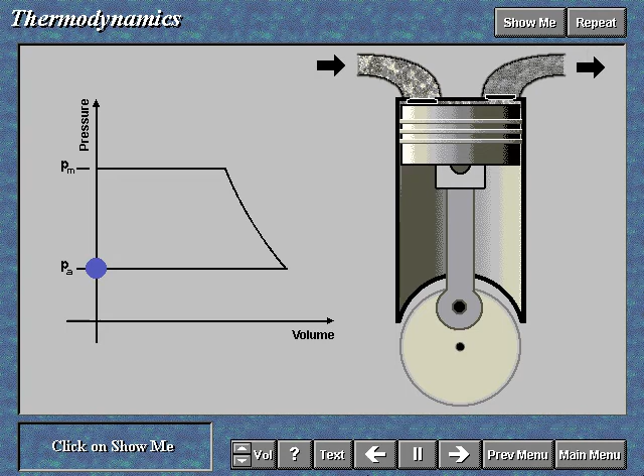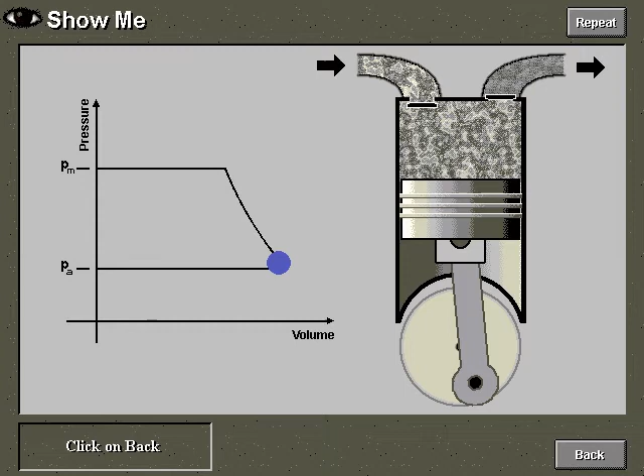The work expended in compression is transformed into heat. It is possible to remove only a small portion of this heat, and as a result, the temperature of the gas rises during compression.

This increase in temperature causes various parts of the cylinder to heat up to an average value that lies between the temperatures at the beginning and end of compression.

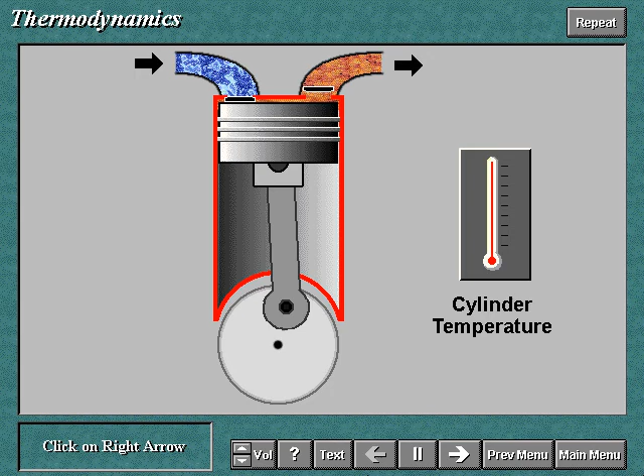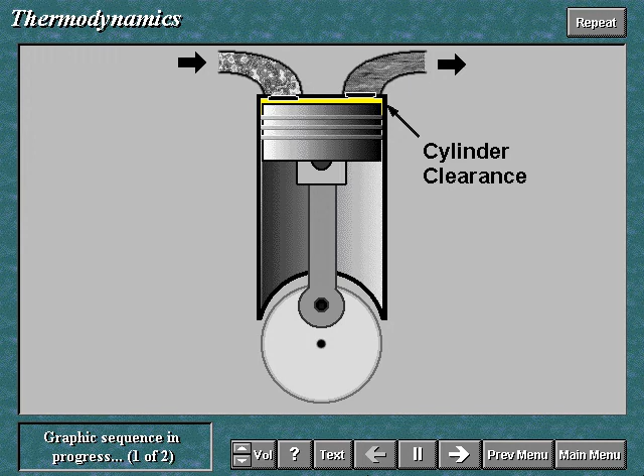In each cycle, there is an area of the cylinder that is not swept by the piston. A volume of gas remains in this area at the end of each compression stroke. This volume is called the cylinder clearance.

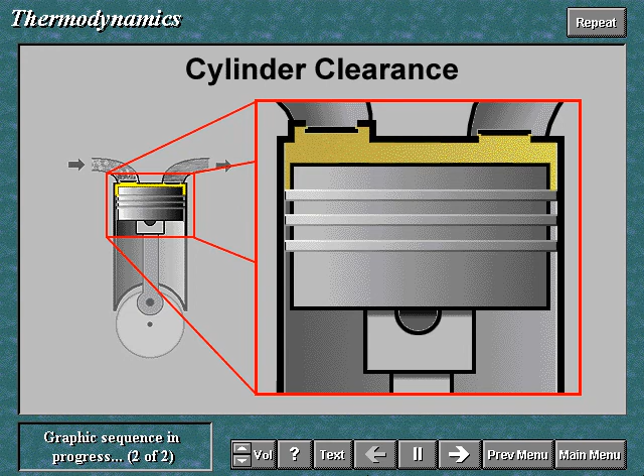The cylinder clearance consists of the volume between the cylinder head and the piston at the end of the stroke, the volume between the cylinder walls and the valves, and the volume due to the difference between the diameter of the piston and the diameter of the cylinder.

Due to cylinder clearance, a certain amount of gas remains trapped within the cylinder at the end of the compression stroke. This gas is under discharge pressure and temperature.

The subsequent suction phase can only begin when this remaining gas has re-expanded to pressure P sub A. The suction valve will not open until this pressure is reached. This causes a reduction in inlet volume.

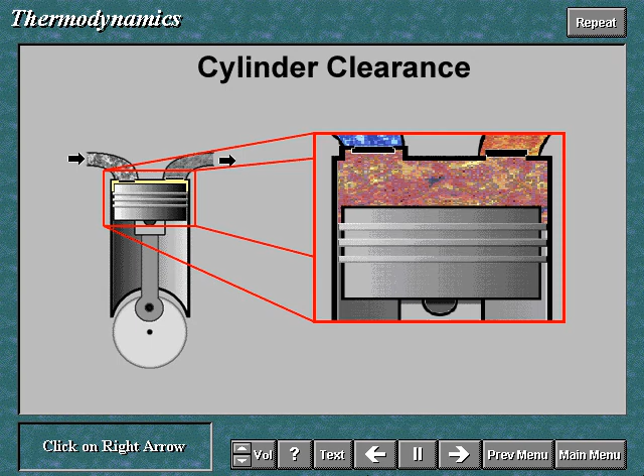Compression occurs only in the forward stroke.

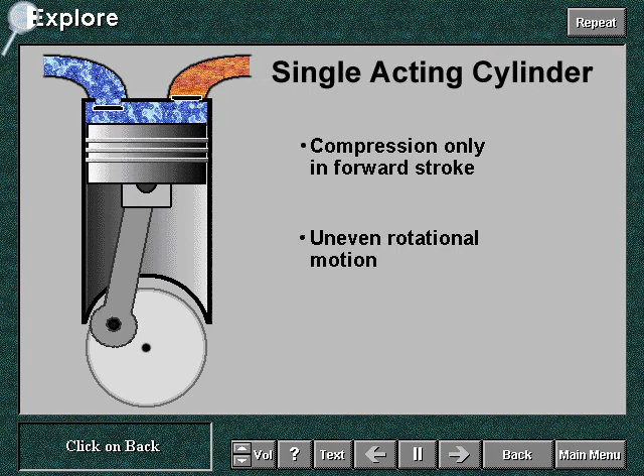Subdividing the compression work between the two strokes of the crank revolution results in more regular rotational motion for double-acting cylinders.

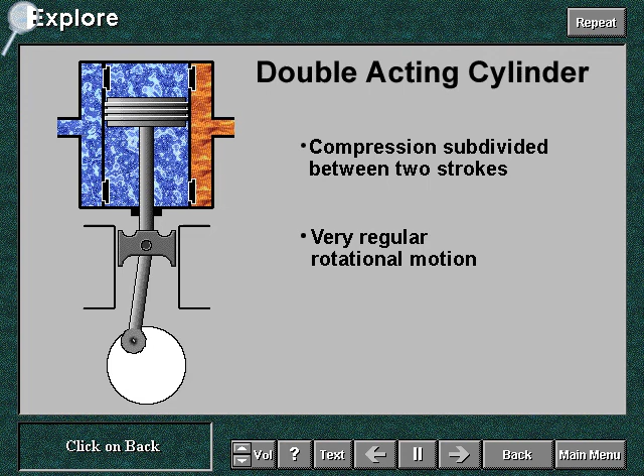In main and big end bearings, the pin always makes a complete revolution. This allows hydrodynamic lift to take place.

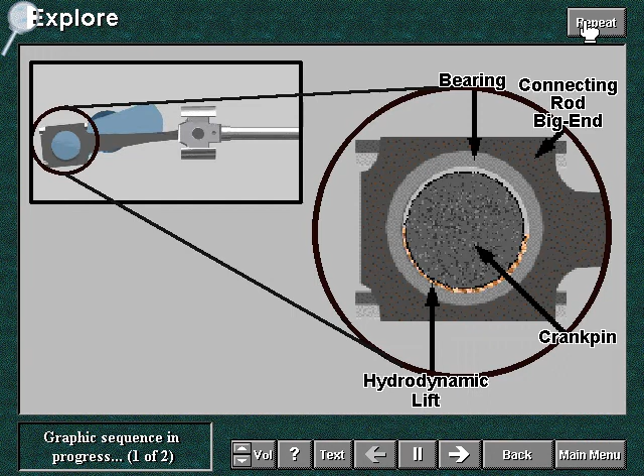In small end bearings, however, the crosshead pin only makes oscillations. The lack of complete rotation makes the conditions less favorable for hydrodynamic lift.

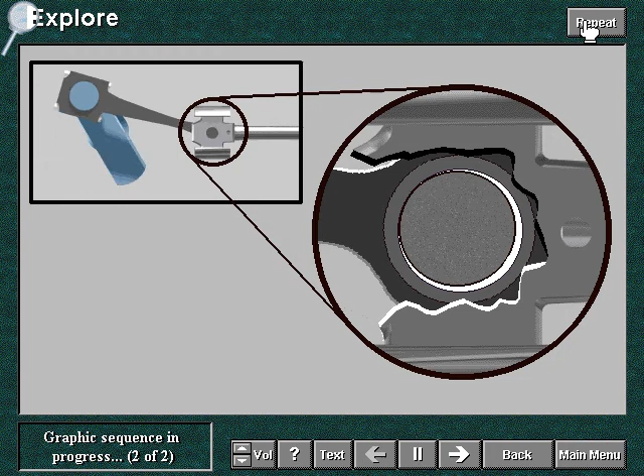All valves used on reciprocating compressors are made up of 4 basic elements: the valve seat, valve plate, springs, and valve stop. The valve seat is the circular component through which the flow ports are opened.

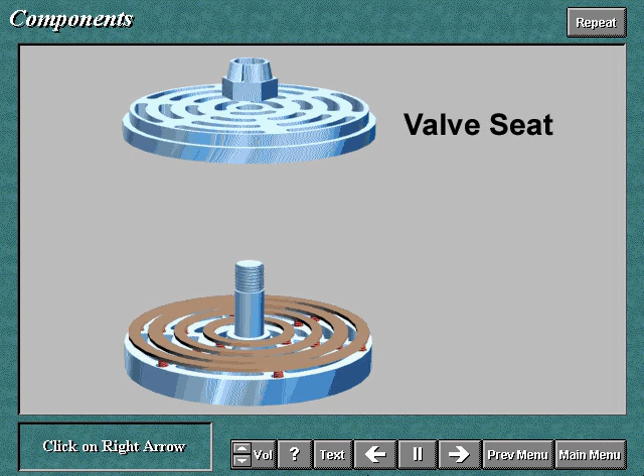It is sealed by the valve shutter. The seat and valve shutter together mechanically support the pressure differential. The seats are mounted in housings arranged along the body of the cylinder.

The valve shutter is the component that alternately opens and shuts the flow ports. The springs are the components that return the valve shutter onto the seat when the flow of gas has stopped.

The valve stop or guard is the part against which the valve shutter stops. It determines the degree of lift that the shutter may have.

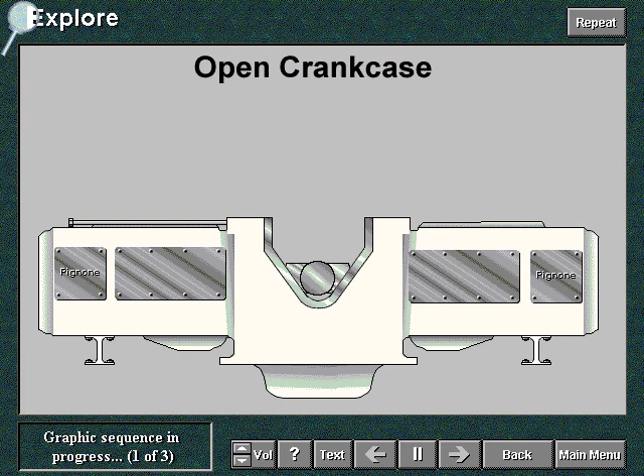An open structure is used on large frames. The crankcase is U-shaped and allows for the crankshaft to be removed vertically. You can see that the pull of the cylinders tends to open the U-shaped crankcase.

To protect from this force, bars must be used to brace the upper part of the crankcase. These bars are called crosspieces.

The valve rings are kept lifted by the drag force due to the gas flow. They remain lifted while this force is stronger than the opposing force of the springs. The valve, however, must close just at the end of the stroke, whether it is a suction or discharge valve.

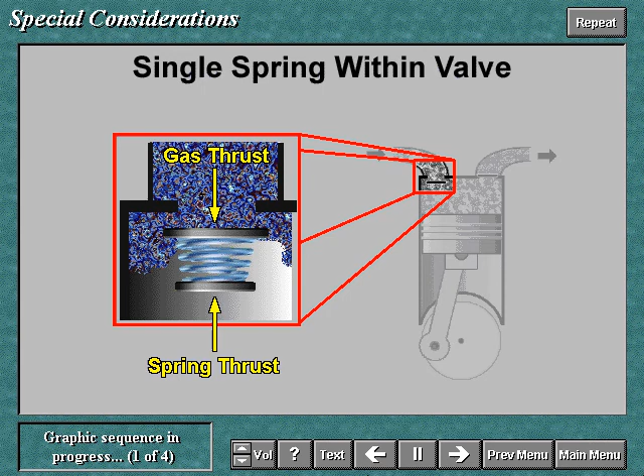If spring stiffness and ring lift or gas velocity are not correctly related to each other, the rings are not stable and will flutter. Springs must be selected so that they are responsive enough to allow the rings to open under the gas force and to avoid vibration.

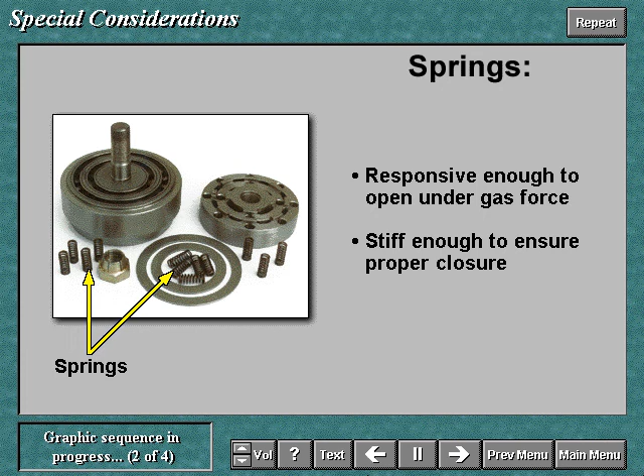They must also be selected so that they are stiff enough to avoid closure after the dead end of the stroke. If the valve remains open after the dead end of the stroke, closure will happen under both spring force and gas force due to backflow of the gas.

and gas force due to backflow of the gas. The combined effect will result in a heavy impact and likely ring damage.

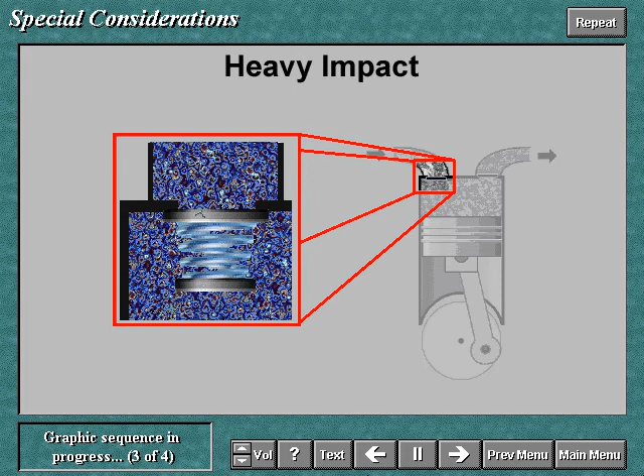Consider now a single-stage compressor. If a higher delivery pressure happens, the compression ratio is increased and volumetric efficiency decreases. Less gas is delivered to the user and the compressor capacity is decreased.

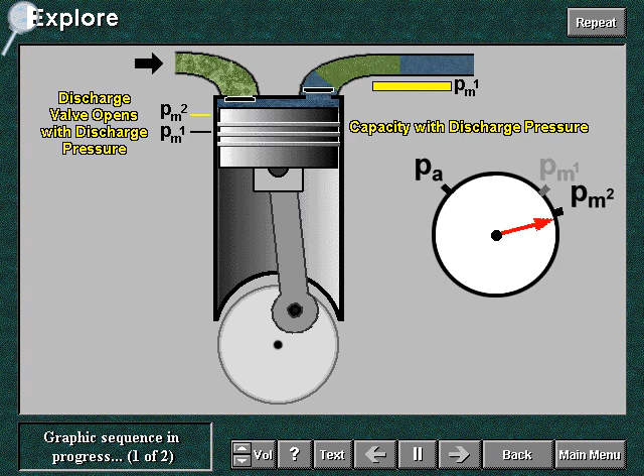As the delivery pressure continues to rise, however, the reduction in flow rate affects the power more than the compression ratio. The absorbed power reaches a maximum value and then decreases.

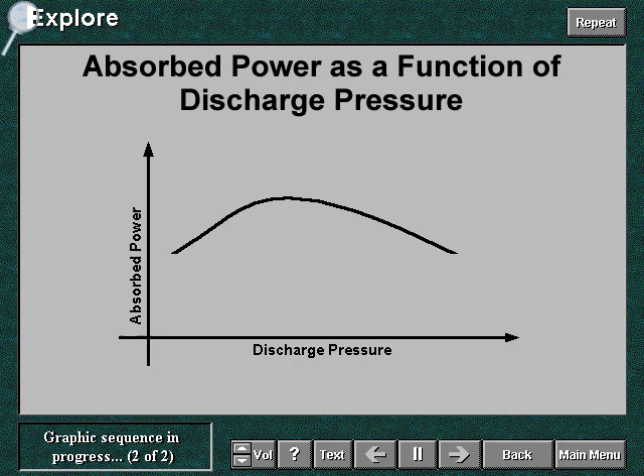Recycle controls capacity by recirculating a portion of the gas from the first stage delivery back to its suction. This system is suitable for multi-stage compressors and works by reducing with the recycle the quantity of gas that is sent to the second stage and beyond.

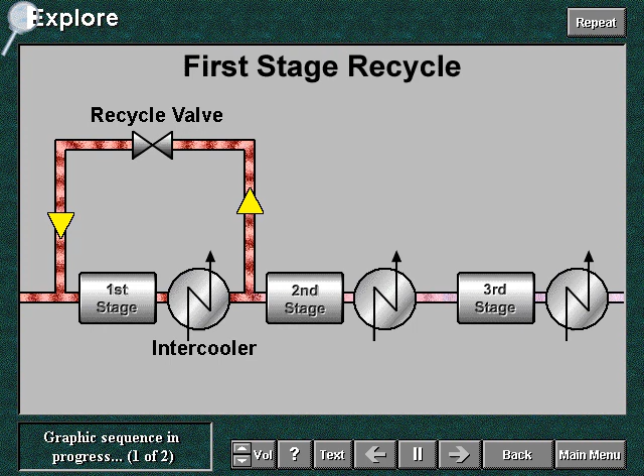The gas amount recycled around the first stage can be varied continuously. The system therefore is a continuous type control.

The first stage handles 100% of the gas under capacity control, but the following stages handle only the reduced flow rate. Therefore, the efficiency of the system is good and increases with the number of stages.

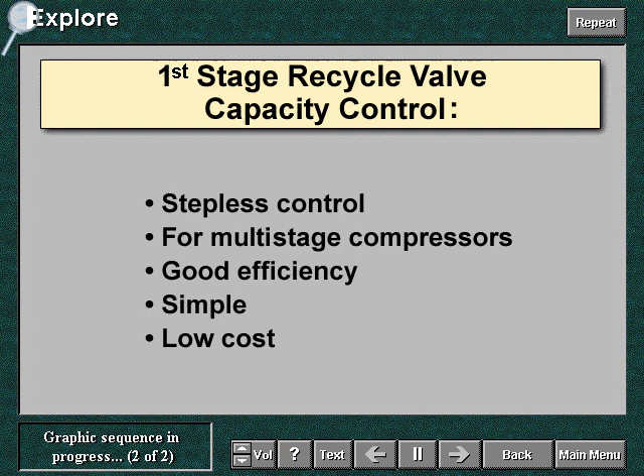First stage recycle is simple and of low cost.